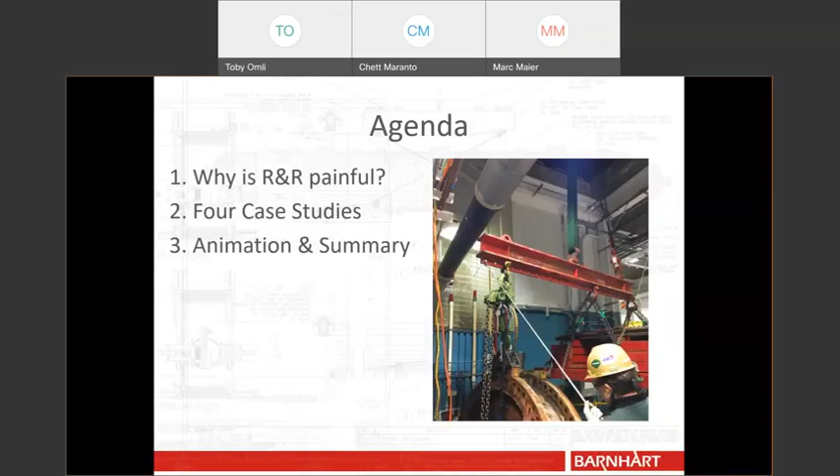Finally, we'll wrap up with a 40-second animation and a summary of some of the presentation highlights. So why valves, pumps, and motors? All 3 are vital components in almost every industrial plant. Motors power pumps, valves control the flow of prized substances throughout the facility, and not only that, but they have to be maintained.

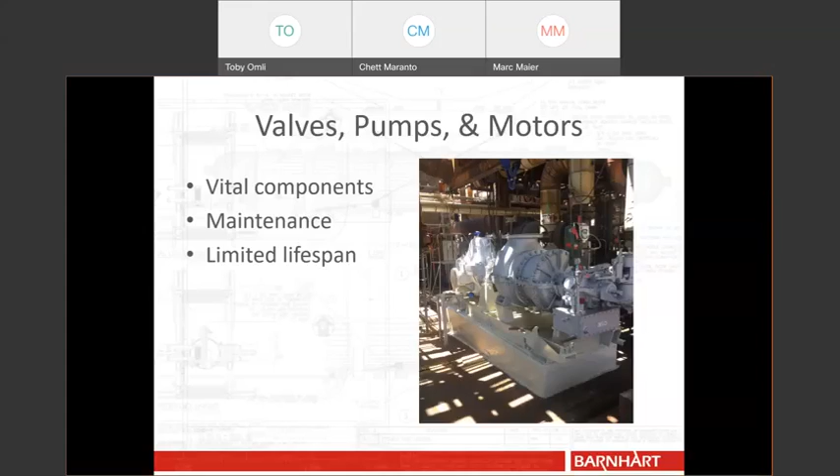And unfortunately, as you all know, they don't last forever. So almost independent of weight, we hear time and time again how painful the removal and replacement of these vessels can be. One of the major reasons is limited space.

Some components were designed to last the entire life cycle of the plant, and now that life cycle has been extended, or components are being upgraded and not being replaced in like kind, or plant expansion has just occurred. It could be a variety of things, and none of these things are really that uncommon.

Another reason is that the component center of gravity may be offset. Maybe initially it was not, but valves can get clogged up over time, and then suddenly that weight can be disproportionately distributed. This can really create pretty substantial stability concerns.

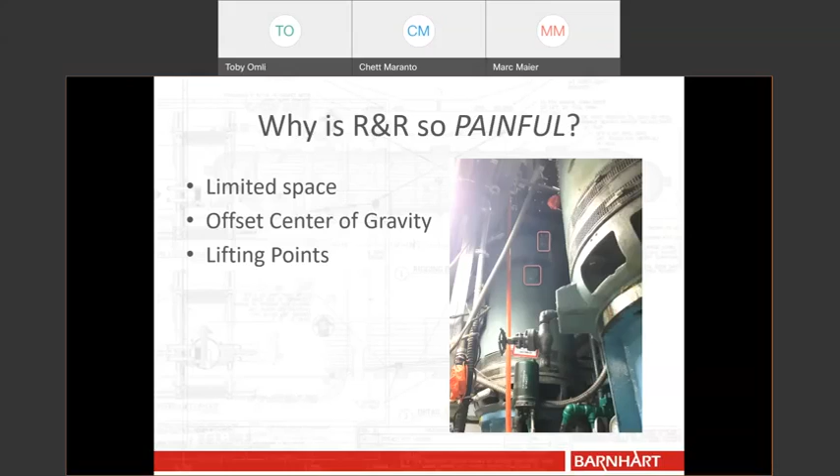Not to mention dealing with lift points. In this picture, you can see 2 trunnions at rather strange locations relative to one another, which can create really pretty complicated rigging.

Let's say a motor goes down, and some of you get assigned to remove and replace that motor with minimal planning. I applaud you guys for figuring that out, but it can be challenging. What is the travel path? Which rigging is sufficient? How will it be loaded? Are the floor beams suitable? Do we have an accurate weight of the existing motor? All things to be considered.

Not only that, but it can require a lot of modifications to the site or piece, whether adding lift points, removing pipes, or opening up walls. And all of this takes time. The longer a plant is down, obviously money's being lost.

To be clear, I know you have certain ways you've always done this kind of work, and honestly, it works. But today I want to present other ways that can lower human exposure, reduce schedule, and also minimize impact to your site.

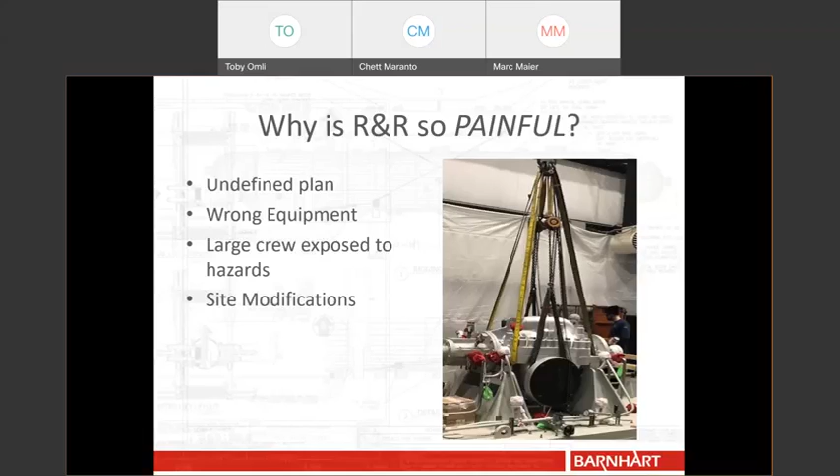Next we're going to walk through a few case studies. Again, you've removed and replaced these components for years. This won't apply to every case, but hopefully these case studies highlight how we have benefited our clients, and then also provide some insight on challenges that you may face in the future.

In the first case study, we were removing and replacing a 5,200-pound butterfly valve. As you can see, it's tucked under the mezzanine there, and there are other components in this picture kind of coming towards us in the page that would impede the valve from coming straight out.

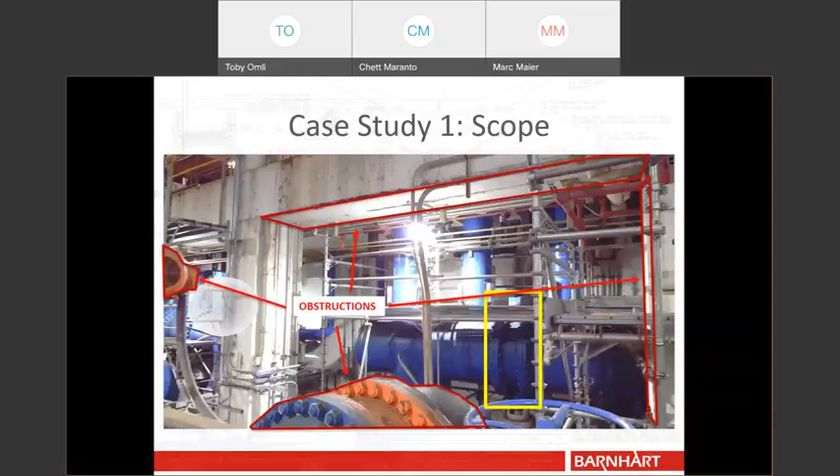So what options do we have? Are we sure that this valve would geometrically fit out? We quickly figured out that this would come down to fractions of an inch. So in this case, a laser scan was required to ensure that no dimension was missed.

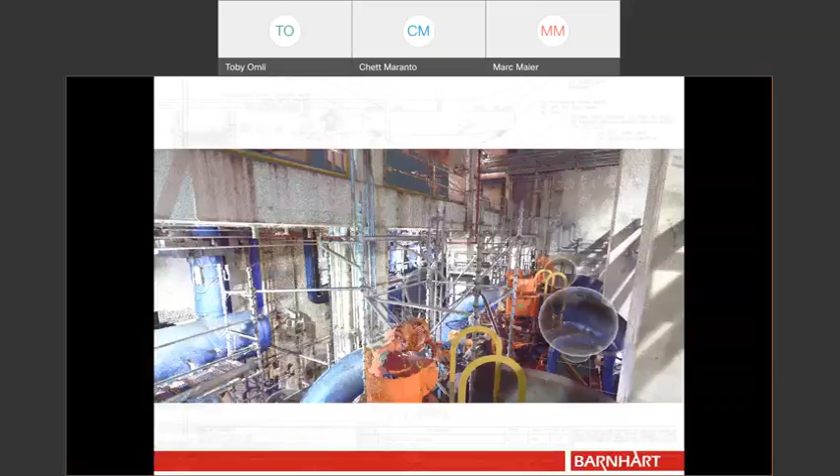We took that scan and then started applying some different potential solutions. Can the valve be extracted from its current location? If so, what is the safest, most efficient way to remove the valve while minimizing site impact?

Here, we can take a 3D model, put it on 2D paper, and that can be a great communication tool for talking through and even developing a plan with a customer.

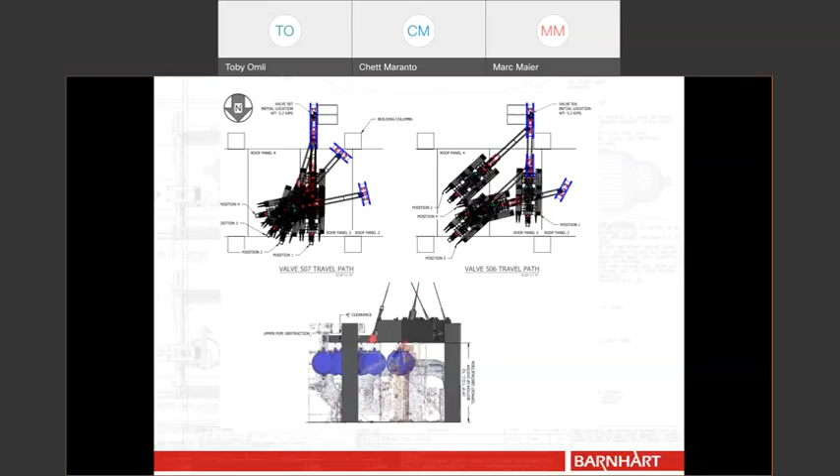What we landed on was a custom single beam cantilever solution that gave us the ability to reach underneath that mezzanine while keeping our tail swing to a minimum.

To rig to the valve itself, we actually designed and fabricated a lifting device to connect through the butterfly valve's existing bolt holes, which you can see in the bottom right-hand corner there, while maintaining the ability to swivel that valve during the extraction process.

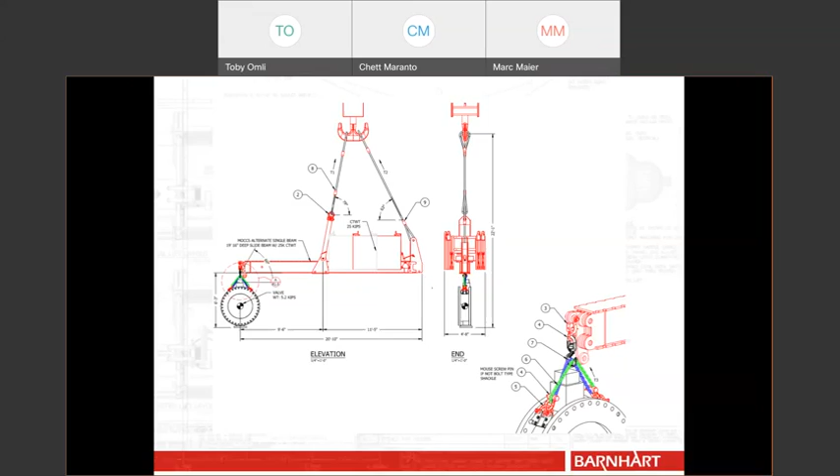And here's some job pictures. I just want you to note the clearances there, not only above the cantilever beam, but also that rear column. Now, were there alternative ways to do this? Of course, but this allowed all other components to stay in place and saved multiple shifts of time.

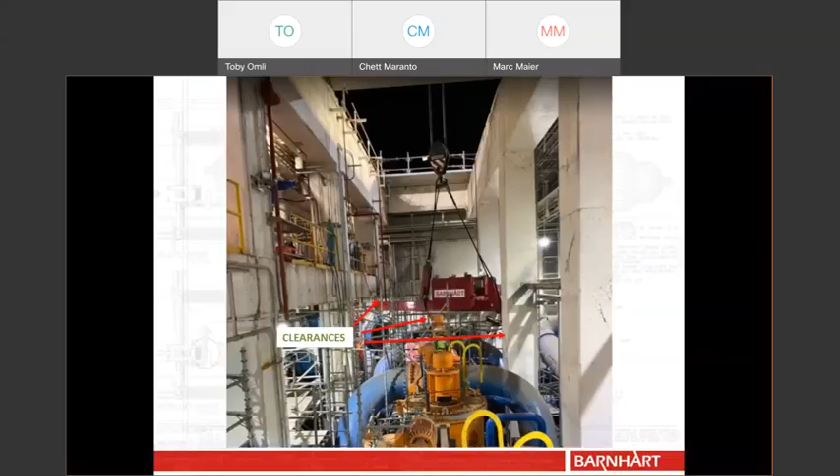This showcases the valve being removed from the hatch. We could have tapped lifting points into the mezzanine, analyzed the structure itself, removed other components, but to eliminate shifts and minimize risk exposure of that crew, we came up with a better solution.

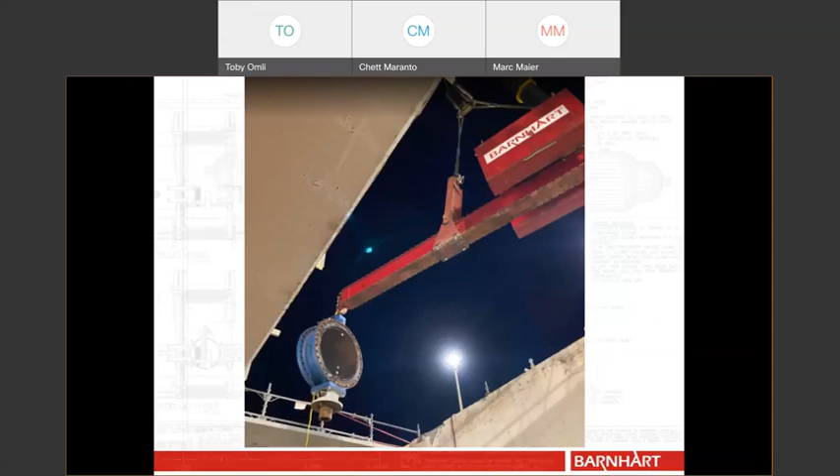Getting into case study 2, there was a series of 24,000-pound water pump motors that had to be removed and replaced. These motors were tucked back into congested areas of the plant. In this case, we utilized existing overhead crane hooks to tail these vessels to horizontal. But out of respect for your time, I just want to focus on the transport aspect of this job.

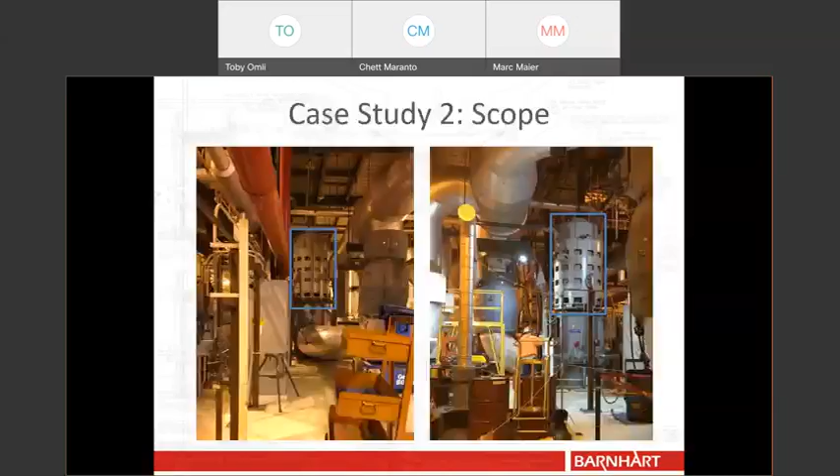And there are the motors in blue. Historically, this has been done a couple of ways. Number 1, using Hillman rollers and C-channel, like you see in that bottom right-hand corner, or 2, laying down steel plate and utilizing air skates.

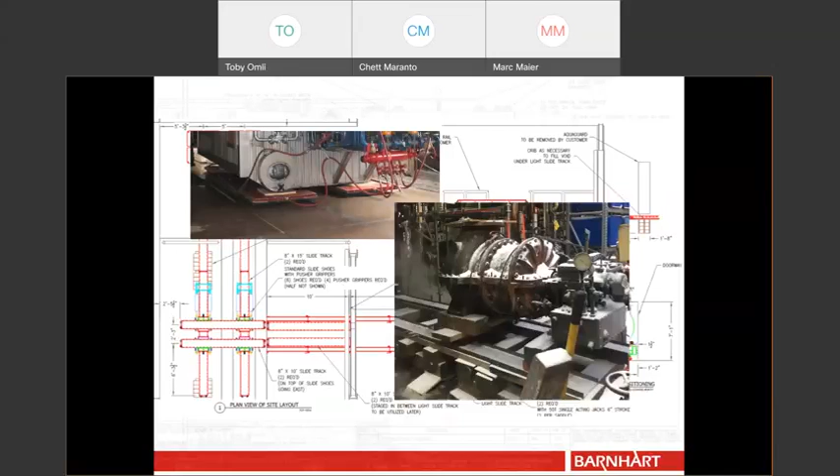Now, completely different picture shown than the motors we were discussing in this case study, but the point is, although both methods worked, there was an alternative.

So setup time to lay down plate for air skates or just devising a clean plan to motivate Hillman rollers can be a struggle. But in this case, we used our positive connection pusher gripper slide system to really do 2 things. Number 1, control the load, and number 2, also minimize setup time.

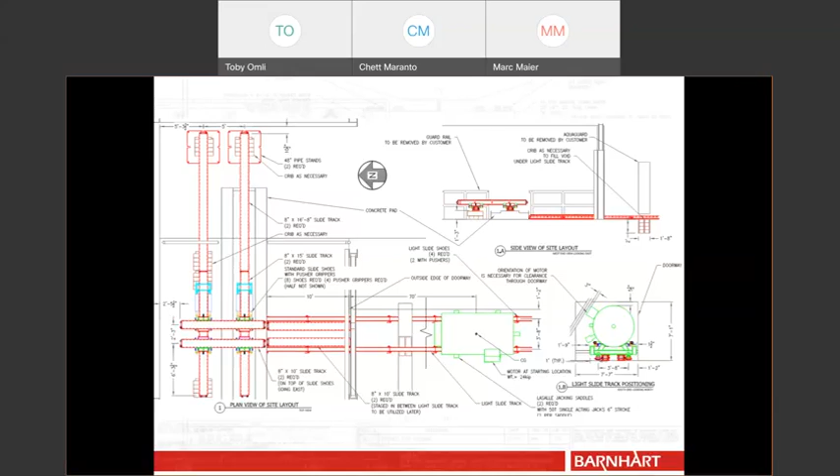In fact, in this job, we utilized both our light slide, which is easy to maneuver by hand, and our 500-ton slide, which allowed us to span some voids along that travel path.

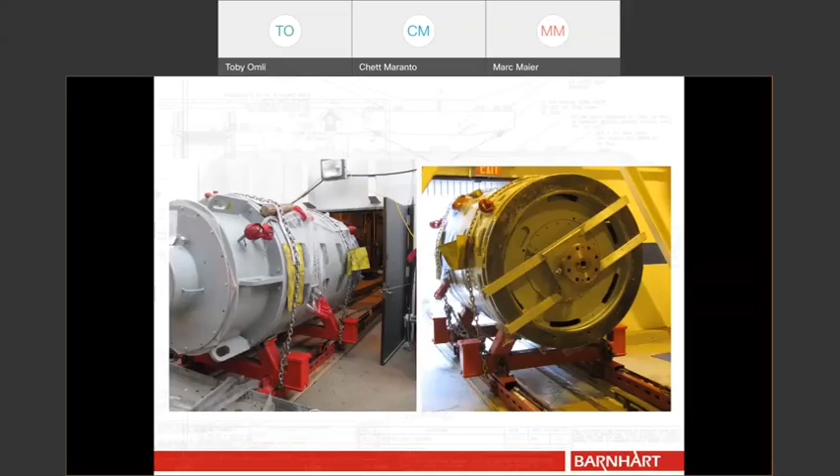Here's a couple pictures of the pump motors on our slide system. Once again, this light slide can be carried by hand, so it's quick to assemble and allows for the controlled movement through a tight door opening, as you can see here. It also kept the crew out of pinch points.

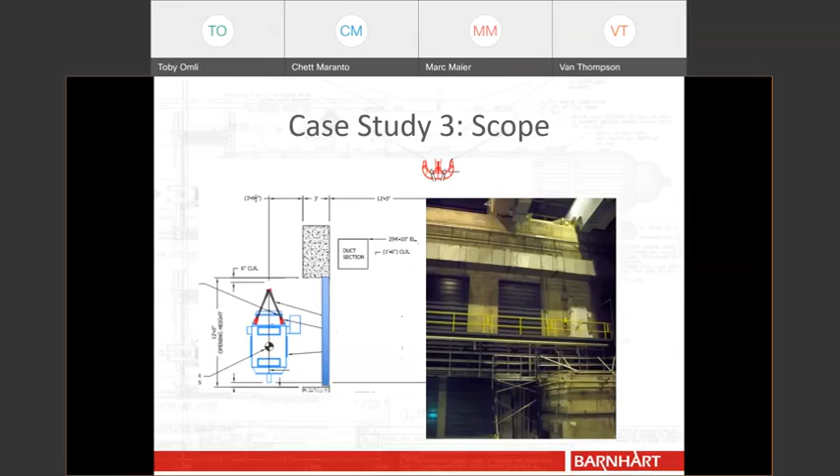Case study 3 showcases the removal and replacement of an 11,000-pound motor. The engineering drawing on the left is really a side view of the picture on the right. So I added some arrows to help you connect the dots. As you can see, the top arrow is connecting the duct to the duct, and then the roll-up door with a bottom arrow.

The issue was the overhead crane did not have the ability to travel over the component that was being removed. It was actually through the roll-up door in the right-hand picture there. And then also you can see the bridge girders just barely at the top of the picture.

So what are our options? Can we jack up the motor and slide it through the opening? Potentially. Is there a better way?

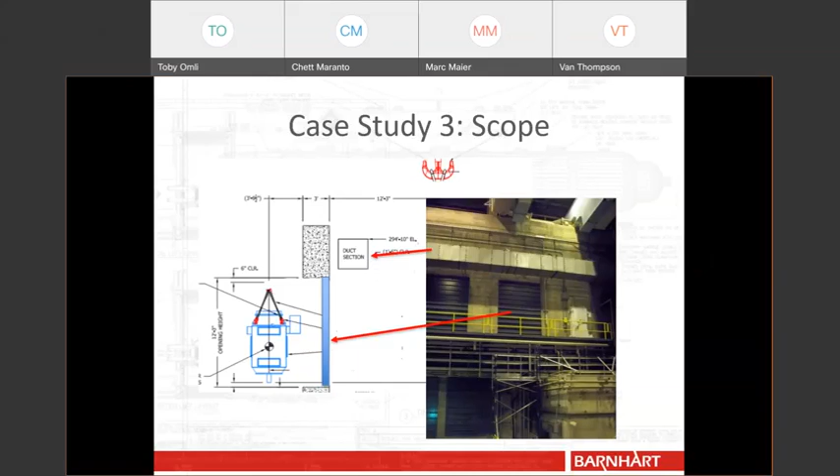We ended up utilizing the plant's overhead crane in combination with our Mini-Max to reach under the duct, through the wall, and to the motor.

Could we have done it another way? Yes. But the time it would have taken to set up the shoring and equipment, not to mention the extra crew members required, it would have been extensive. And this was a good way to partner with the plant and their resources, specifically the overhead crane, to optimize the solution, ultimately saving significant time.

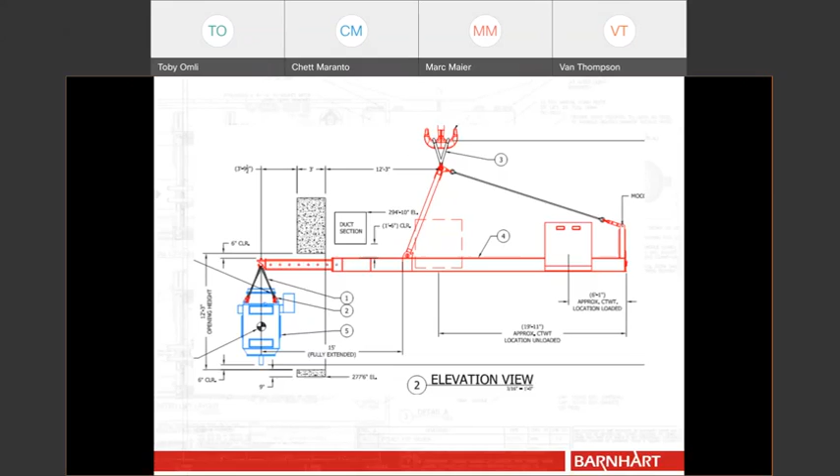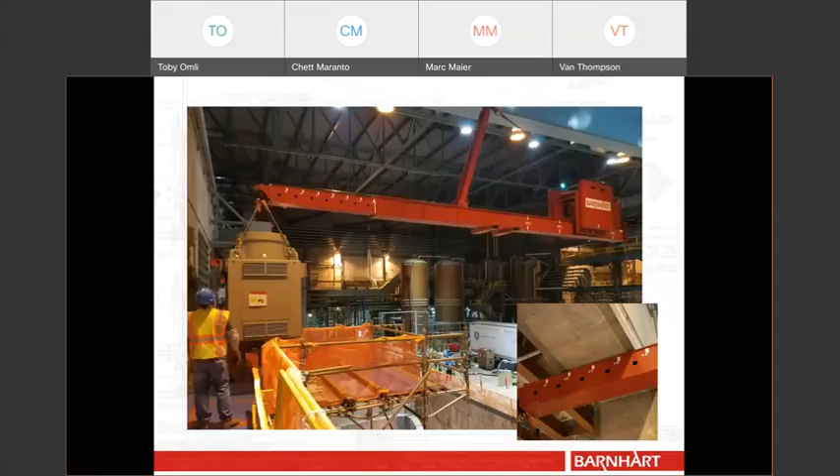And for our last case study, we had to remove and replace a 16,000-pound delta valve. At first glance, it's hard to even locate a delta valve because of all the obstructions and the way it's hemmed into place there.

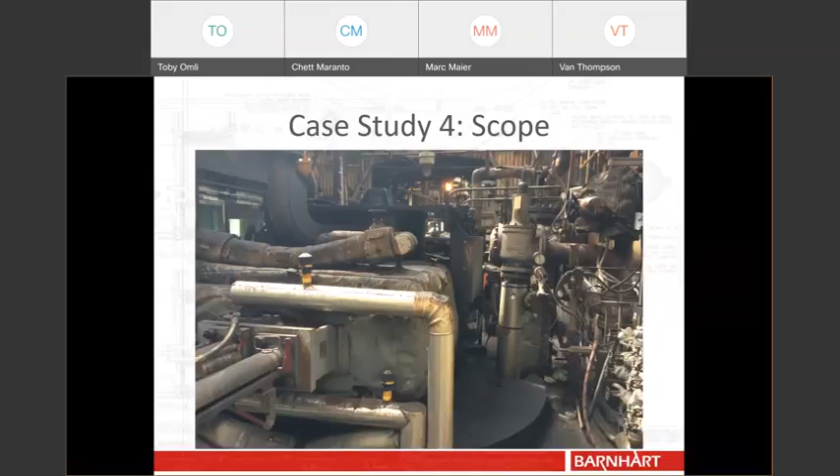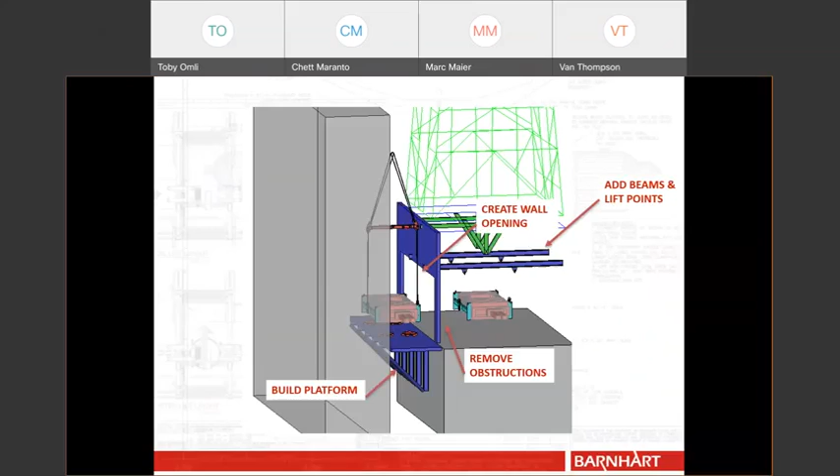Maybe adding lift beams above, removing obstructions on one side, skating it over through a wall opening and building a platform. And we have done a variety of these things, with similar components over the years.

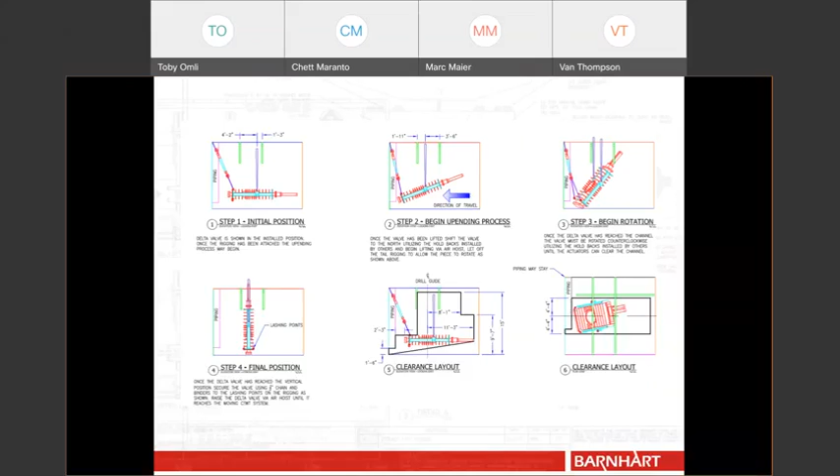But before dialing in our solution, we had to do some clearance checks, similar to those checks that we did for case study 1 a few slides back. And we were hoping to find a way to upend this valve through the above structure and minimize modifications to the site, like adding those lifting beams or removing piping.

With lots of planning, in conjunction with the plant team, we actually devised a solution to reach through a void in the derrick structure, upend and remove that valve using adjustable rigging. And as you can see, our MOX was just floating over top of that elevator shaft.

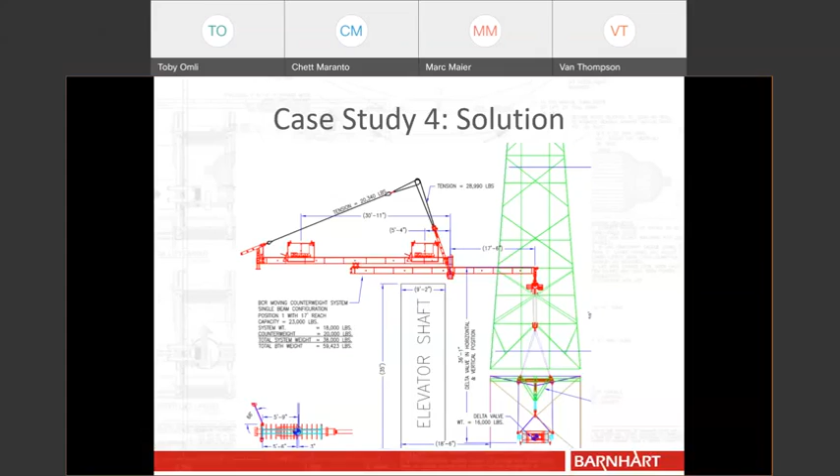And then here's proof of concept. So hopefully you're starting to catch a glimpse of some alternative ways to remove and replace these components. And these are components that have been used for decades, right?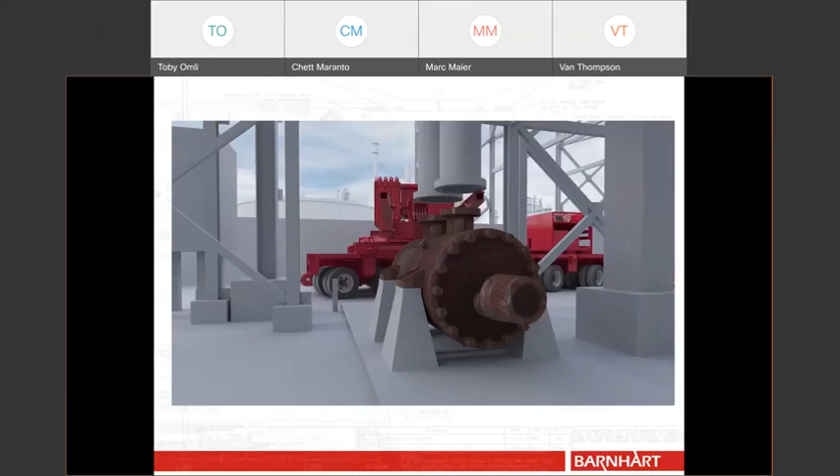But the idea here is the video hopefully helps to highlight that the possibilities are really endless for removing these components.

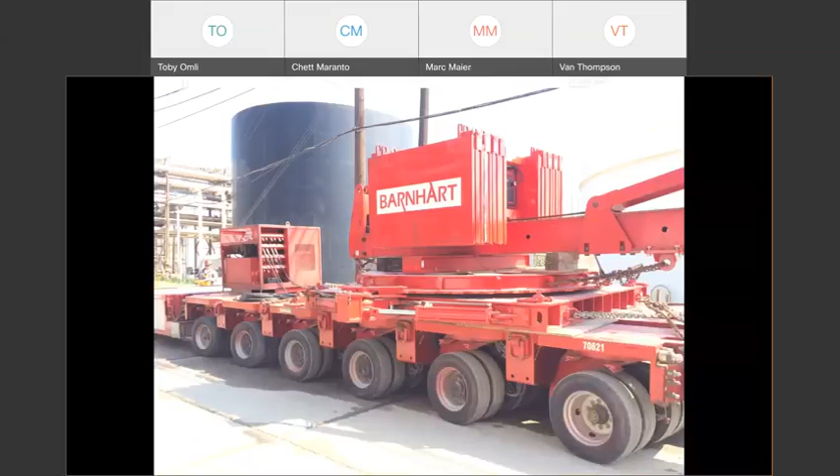Animations look great, but this is the kind of stuff we have done. So here we've got a cantilever system on top of our custom turntable, on top of a self-propelled modular trailer, in real life.

To summarize, a lot of you have removed and replaced these components for years, and so have we. But I think it's important to understand that there is alternative ways to remove and replace motors and valves. Using larger than necessary crews and doing things the same way they've always been done may not be the most ideal way to attack the problem going forward.

So let's work together on coming up with innovative and effective solutions to reduce human exposure, shorten schedule, and lessen impact.